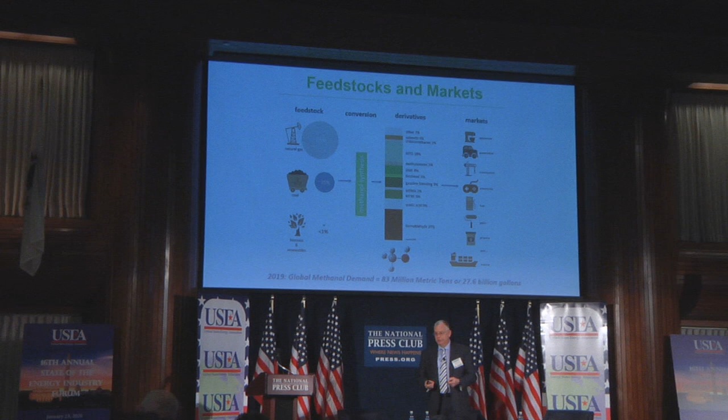Once you take that synthesis gas and turn it into methanol, CH3OH, the simplest alcohol fuel, you open up a wide range of markets. Last year, total global methanol demand was about 83 million metric tons, or 27.6 billion gallons.

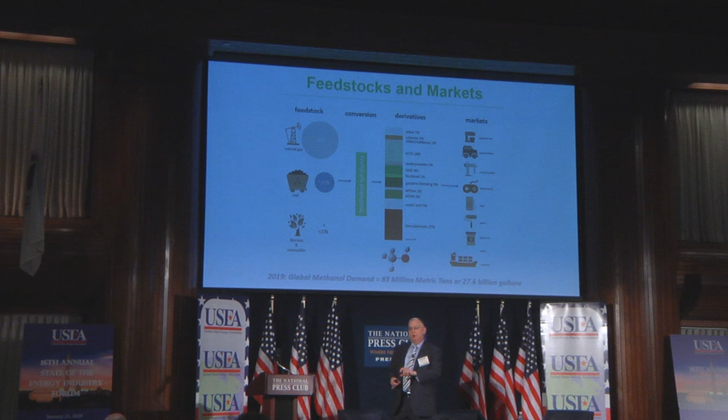We're sort of on the scale of the global ethanol industry. 60% of our market uses methanol as a chemical commodity, a building block for hundreds of products that touch our daily lives—paints, plastics, solvents, resins, car parts. But 40% of our market is the use of methanol as an emerging energy resource, and the fastest growing sectors of methanol demand are in the energy sector.

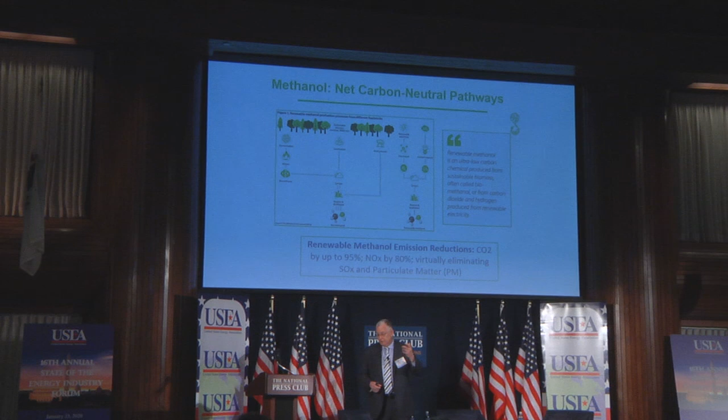Now, we have a number of pathways to produce methanol as a net carbon neutral fuel. You can take any biomass resource—municipal solid waste, forestry residue—and gasify it to produce that synthesis gas used to make methanol. We can also take biogas from anaerobic digesters, landfill gas, wastewater treatment, and dairy farms, and use that biogas to make methanol.

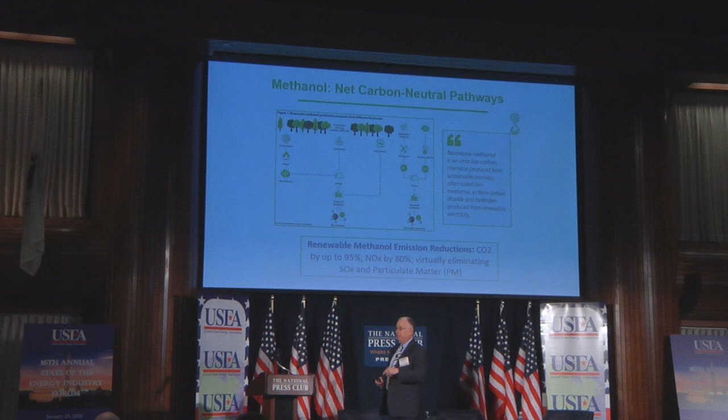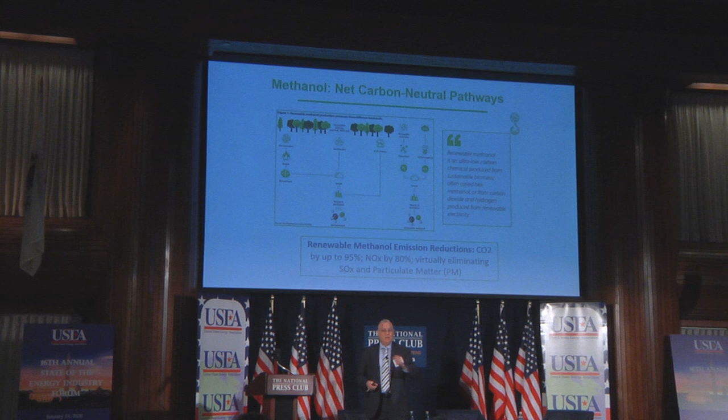One of our member companies is actually the largest purchaser of biogas here in the United States. They produce biomethanol in Texas that's actually sold into the European market, where it's considered a second-generation advanced biofuel and qualifies under the European Union's fuel quality standard. You can blend 3% methanol in gasoline anywhere in the European Union today—it's part of their fuel requirements.

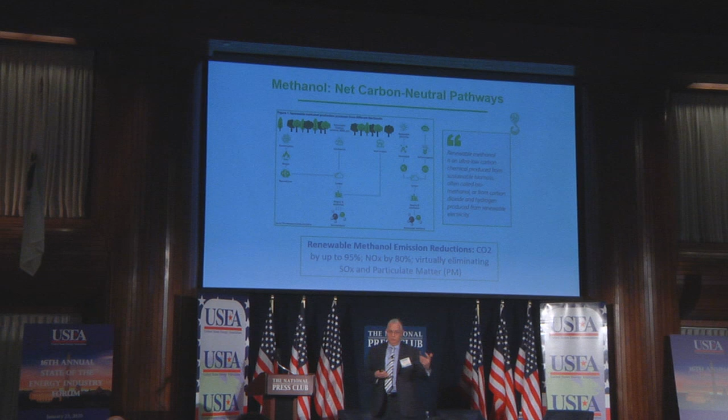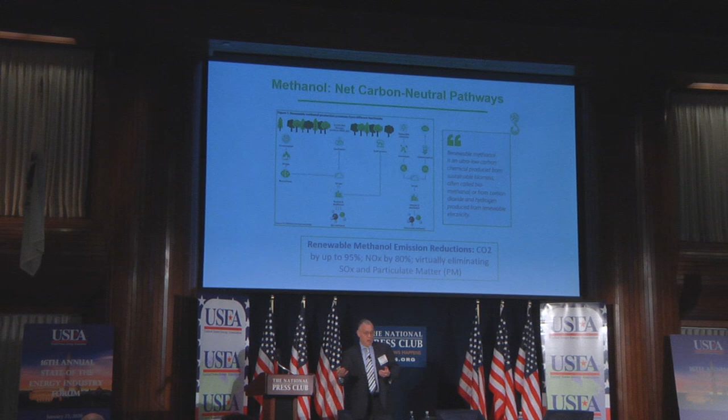You can also take any renewable electricity resource—solar, wind, geothermal, hydropower—and produce hydrogen through electrolysis of water. Now again, to make methanol synthesis gas, hydrogen and CO2, the CO2 can come from a process waste stream, a cement plant, aluminum or steel mill, or in the near future, we'll see direct air capture of CO2—literally stripping CO2 from the atmosphere.

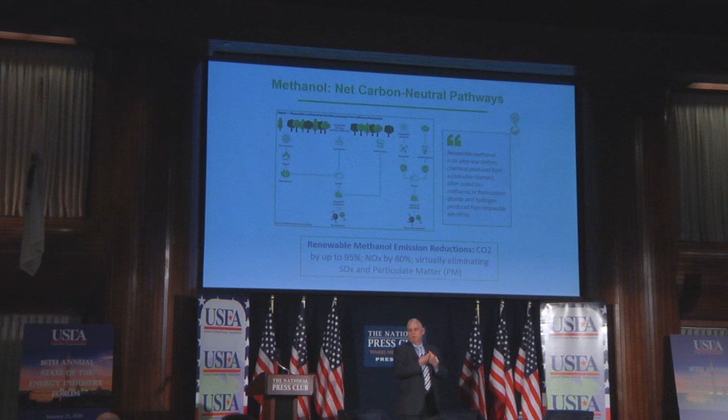Combine renewable electricity and CO2, and you make renewable methanol. That's a carbon neutral fuel, reducing CO2 emissions by up to 95%. And it's being done commercially today.

Here in the United States, we produce our methanol from natural gas. Because of the shale gas revolution, over the last 10 years, in the 2010s, we saw a resurgence of methanol production. We had methanol plants that had been mothballed for a decade brought back to life, and we have new greenfield plants being built in the United States.

We had two plants that were literally cut up in Chile and moved to Louisiana to take advantage of the affordable natural gas here in the States. And more is on the way—we've got a plant being built right now in West Virginia using Marcellus shale gas, and there's another plant coming online later this year in Louisiana that's being built with some investment from China.

And we've got a lot more plants that are on the way. Each one of those methanol plants will cost somewhere between $1.1 to $1.8 billion to build. We'll create thousands of construction jobs, hundreds of permanent jobs, and we'll use a lot of natural gas, about 125 million cubic feet a day, or 45 billion cubic feet a year. So a methanol plant is a huge consumer of natural gas.

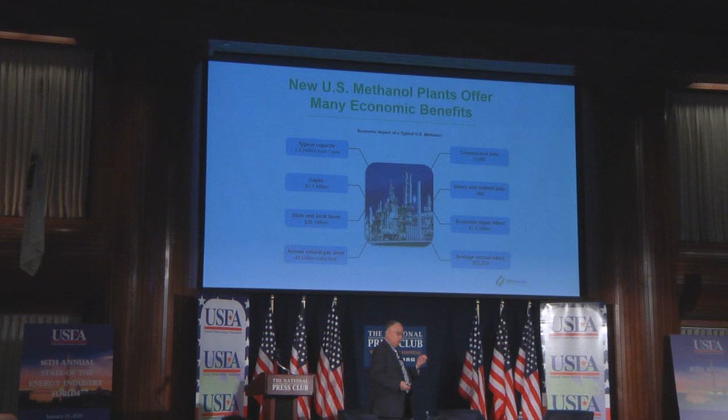As we're building all those methanol plants, we're looking at mostly an export market. China is the world's largest market for methanol. China consumes more than half of all world methanol demand. The fastest growing segments there are the use of methanol as an energy resource, the direct use of methanol as a fuel, and also MTO, methanol to olefins, olefins being the feedstock for plastics.

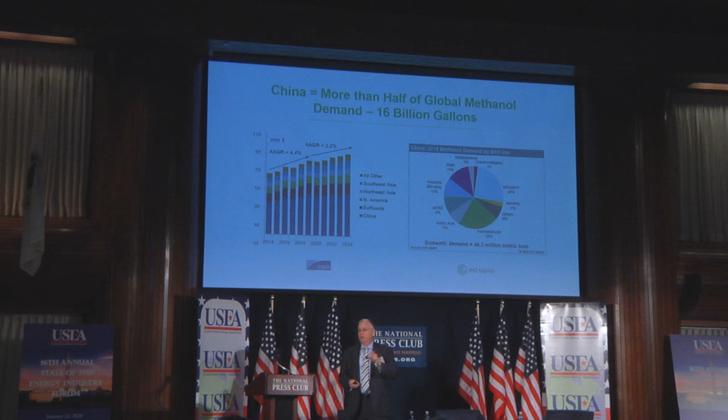Now we also have tariffs. We've talked a bit about tariffs today. Methanol has a 25% tariff on both the US and Chinese side. The US went first, China reciprocated. Now, we don't actually import methanol to the US from China. We're building methanol plants here for an export market. China is the world's largest market for methanol. The Chinese don't want to sell us their methanol, they want to buy our methanol. That would reduce our trade deficit with China. But we have a 25% tariff.

We also talked a little bit today about the phase 1 deal announced last week between China and the US. China has agreed to purchase $52 billion more in energy products from the US in the next 2 years. Methanol is on that list as an energy product from the US, but with a 25% tariff, it's kind of hard to compete on global markets, particularly when the main supplier of methanol to China is Iran. They're not facing a 25% tariff.

Now, speaking of energy markets in China, one of the fastest growing markets there is the use of methanol as a direct transportation fuel. The EIA put out a study 2 years ago now where they were looking at the direct use of methanol as a fuel in China at about 200,000 barrels per day. That use is as M15, 15% methanol blended with gasoline. So 15% methanol, 85% gasoline, used in the existing fleet of passenger cars as a high-octane fuel.

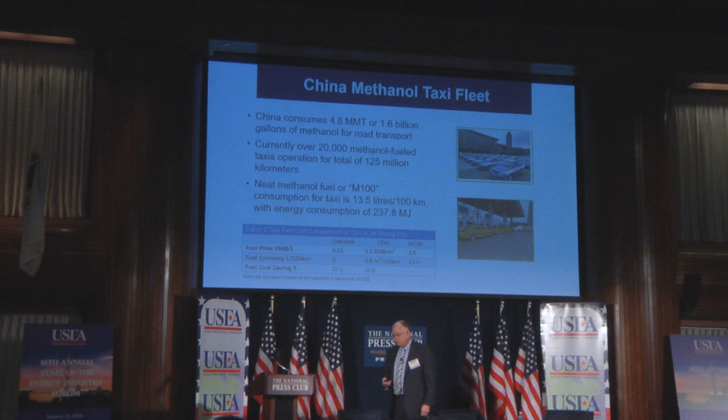The Chinese government last year announced a public policy promotion for the use of M100 in cars, trucks, and buses. It was driven by the Ministry of Industry and Information Technology and 7 other ministries, calling again for the commercial introduction of M100 fuels. They've now approved 32 different vehicles from 9 different manufacturers, heavy duty and light duty, for the sale and use of methanol fuels.

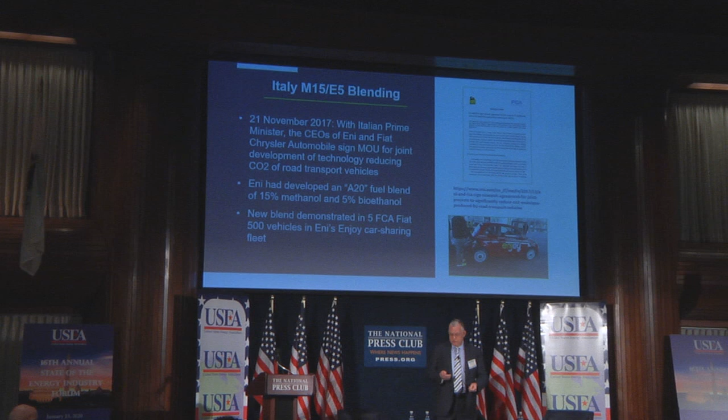In Europe, one of the largest integrated oil and gas majors, Eni in Italy, joined with Fiat Chrysler to look at how to reduce CO2 emissions from today's cars. And they came up with an A20 blend: 20% alcohol, 15% methanol, 5% ethanol. It reduces CO2 emissions. They've demonstrated this in a fleet of Fiat 500 cars. They find that this A20 blend is a 100 RON fuel. That's important because automakers are always targeting 100 RON for more efficient, high-octane fuels. Methanol can do that. They also showed that this fuel is transparent to all E10 cars, which means that while both alcohols, methanol and ethanol, are slightly more corrosive than gasoline, there's no problem using this high-octane, high-alcohol fuel blend in today's cars.

In Germany, there's a program called C3 Mobility, for closed carbon cycle. It's a program of the German government and the auto industry. What they're looking at is, again, how do we reduce the greenhouse gas emissions from the automotive sector? Their focus is on the renewable methanol molecule. So if you look at Germany, they're supposed to be a carbon neutral economy by 2050.

To get there, you've got to use a lot of renewable energy. Now, Germany doesn't have the capacity to produce all the renewable wind or solar power that they need to get to their targets. They will have to import that renewable electricity in some other form.

Now, in Europe, we talk a lot about e-fuels, electrofuels, power to X. It's taking that renewable electricity and turning it into a liquid fuel that you can move around the world. So you can take solar and wind farms in North Africa, turn it into liquid methanol, and ship it into the German market. Germany expects that by 2050, one third of their total energy fuels will come from this power to X, and methanol is one of the fuels they're looking at.

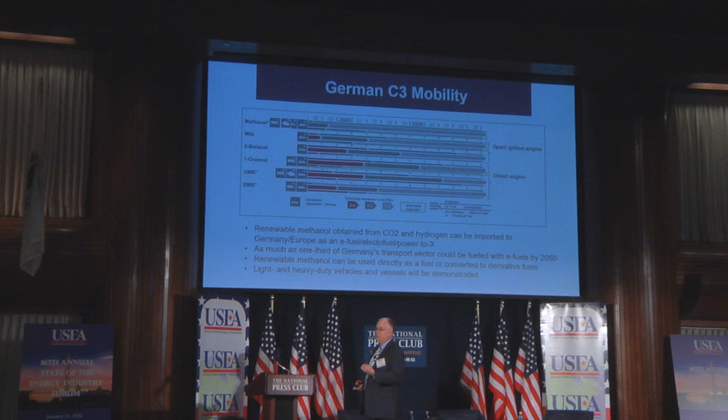So under this program, they'll be demonstrating a wide range of light-duty cars and heavy-duty vehicles running on methanol and also derivative products. They'll take that methanol, turn it into gasoline, or turn it into other fuels like OME and DME that can be used in heavy-duty vehicles.

Now, turning from road transport to shipping, the shipping industry is being driven by emission reduction requirements from the International Maritime Organization. This month, the requirements to reduce sulfur in bunker fuels went into place. By 2050, shipping is supposed to reduce their greenhouse gas emissions by 50%. Now, the ships going on the water today are going to be on the water for 20 to 30 years, so for shipping, they've got to make decisions now about how to meet their obligations for 2050.

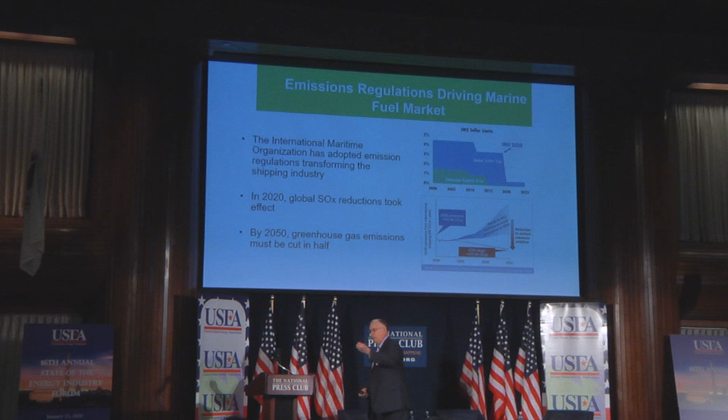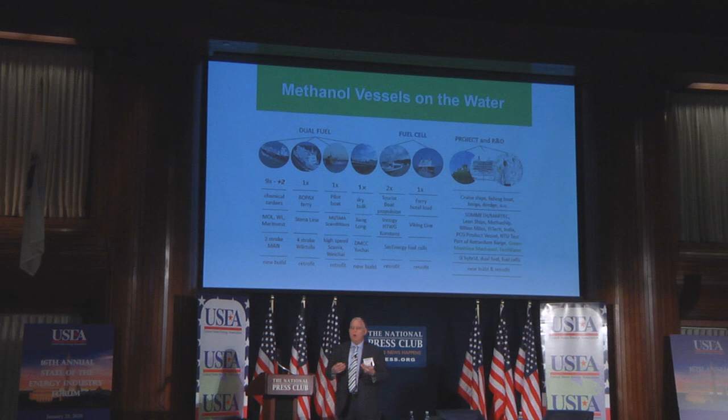Methanol is one of the options for shipping. We've got a number of vessels on the water today. Some of these are ocean-going chemical tankers with dual fuel capability - they can run on any diesel bunker fuel or methanol and switch back and forth with the press of a button. And now we're seeing this use of methanol as a fuel, as a hydrogen carrier, in cruise ships. We're also looking at using methanol in workboats, tugboats, and ferries. All can be used with methanol.

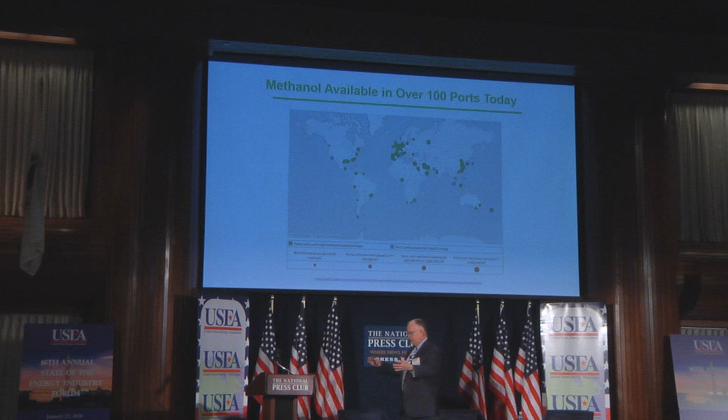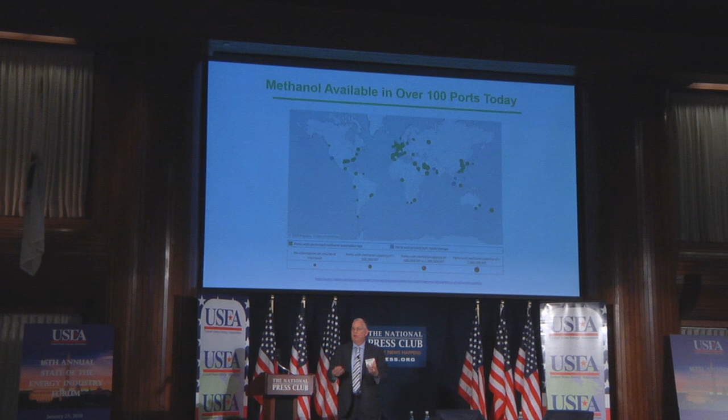Methanol is one of the most widely shipped chemical commodities in the world. Of the 83 million metric tons of methanol consumed last year, 60% moved from one continent to another. Any port where you've got large chemical storage tank farms, you've got methanol storage capacity. So we've already got methanol available at 100 ports today. That methanol is in the port right now - it's one of those widely shipped chemical commodities in the world.

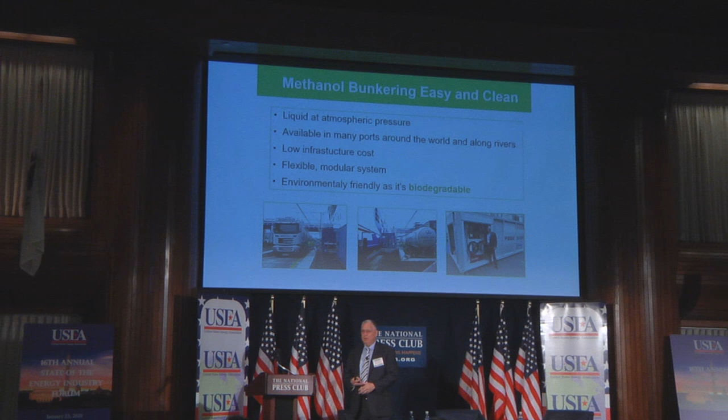In terms of cost, methanol has half the energy content of diesel, so you need twice as much. But even though we need twice as much fuel, we're competitive with today's bunker fuels. Today, methanol is actually selling at a discount to low sulfur marine gas oil, so we can be competitive on fuel cost. In terms of bunkering methanol, it's a liquid at room temperature and ambient pressure - it's easy to store, easy to move from the port, from a bunker vessel, and onto a ship. Methanol is also readily biodegradable, so if you had a spill, it's much safer for the environment than any of the diesel bunker fuels used today.

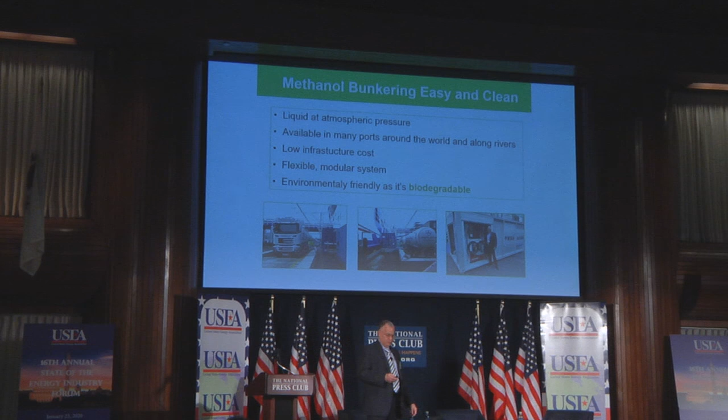Now, to turn again, I want to talk a little bit more about China. I've been to China many times, and every time I go, I hear about some new market for the use of methanol in China.

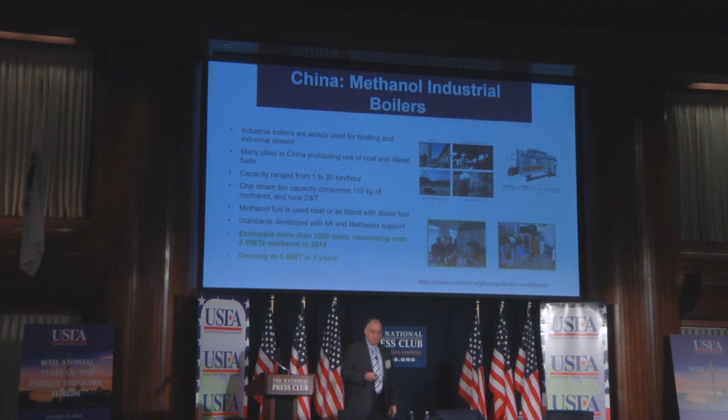China is now banning the use of diesel and coal in industrial boilers used for industry and residential heating. There are more than 1,000 boilers that have now been converted to run on methanol, about 2 million tons of methanol demand. In China, they have less than one tenth of the pipeline infrastructure for natural gas that we have here, so natural gas in many cities is not an option for these industrial boilers. If you take away the diesel and coal, what are you left with? Methanol is an option, and it's actually in most cases cheaper than the use of natural gas, even if it were available. We're also seeing the use of methanol in clean cook stoves in China.

Some of these are one-burner stoves used in residences, but mostly we're talking about large commercial stoves used in restaurants and central kitchens. There it's 5 million tons of methanol demand, that's 1.7 billion gallons, and literally thousands of restaurants are using methanol as a clean cook stove fuel.

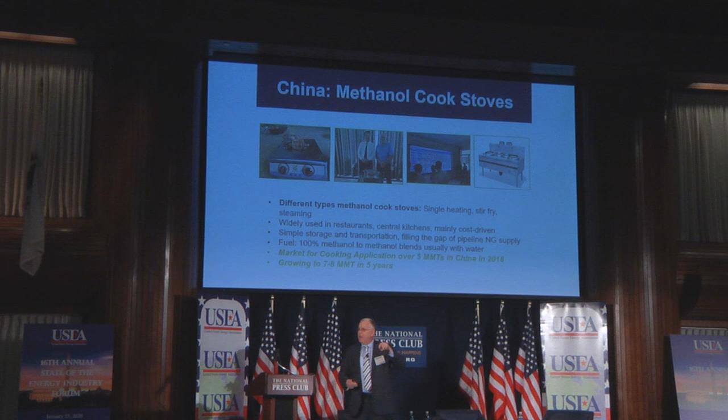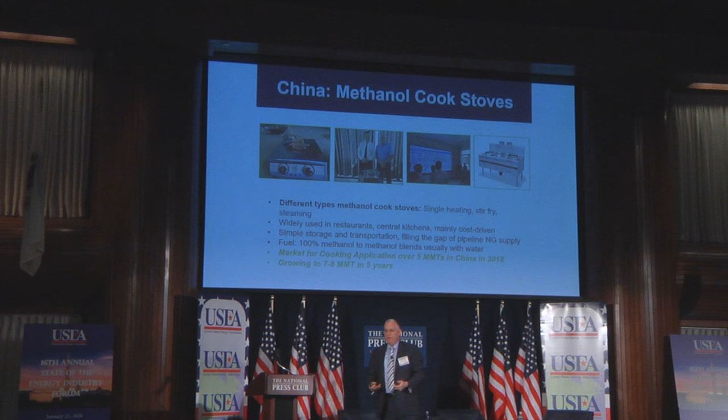This picture shows a cook stove manufacturer in Kunshan, north of Shanghai. They've got a control room with a big screen showing 1,000 points on a map. Each point represents a commercial kitchen using a methanol cook stove. They're so sophisticated they've got cameras in each kitchen, so they can see how it's being used and make sure it's safe. They can control the methanol supply remotely—if a guy doesn't pay his bill, they can turn it down. They can also dispatch methanol through an app; you just go on your phone and say send me this much methanol, and they can ship it immediately.

We're now seeing the use of methanol in kilns for glass and ceramic production. China produces 60% of the world's glass products. When you're using methanol to make ceramics, remember the molecule is CH3OH—there are no carbon-to-carbon bonds, and it's carbon-to-carbon bonds that produce soot or particulate matter. So you actually produce a higher quality ceramic using clean-burning methanol, and it's cheaper than the propane it's largely displacing. So it's cheaper and it's higher quality.

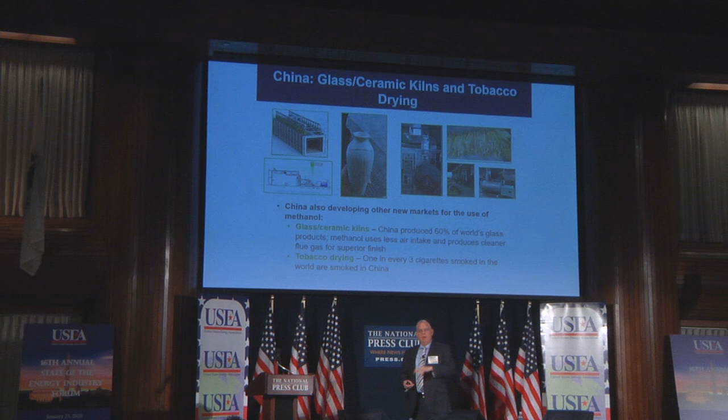They're also using methanol for drying tobacco in China. Every third cigarette smoked in the world is smoked in China, so it's a big market. Also, in India they're now using methanol for drying tea, which is another emerging market. The newest market I heard about is the use of methanol for home heating. In one province, Shanxi, there's now 30,000 homes using methanol for heating, and another 50,000 will be added this year, so we're seeing that market grow in China too.

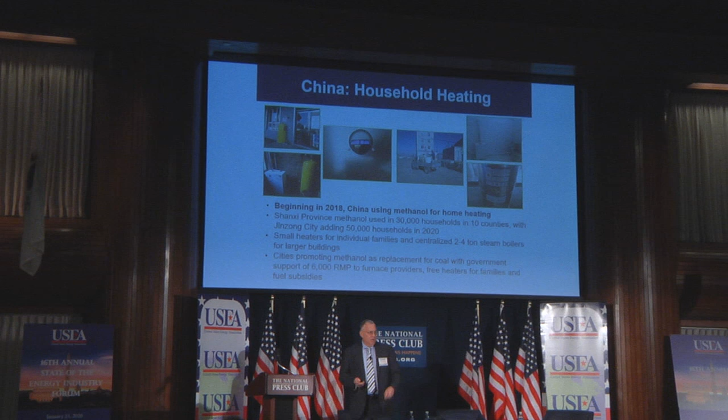Now I want to close by talking about the use of methanol as a hydrogen carrier for fuel cells. As Deepka noted, there's a lot of hydrogen in methanol, CH3OH—it's got the highest hydrogen-to-carbon ratio of any liquid fuel. You can take that liquid methanol, put it on a car, and reform it to hydrogen. So you can take a fuel cell, fill up a car with liquid methanol, and then use the hydrogen from that methanol to fuel the fuel cell.

We're seeing applications in stationary power—typically cell phone towers or remote applications—where they're using methanol instead of diesel generators or battery sets to run cell phone towers. It's also being used in soldier power: there are US troops using methanol fuel cells instead of batteries, reducing the weight soldiers have to carry.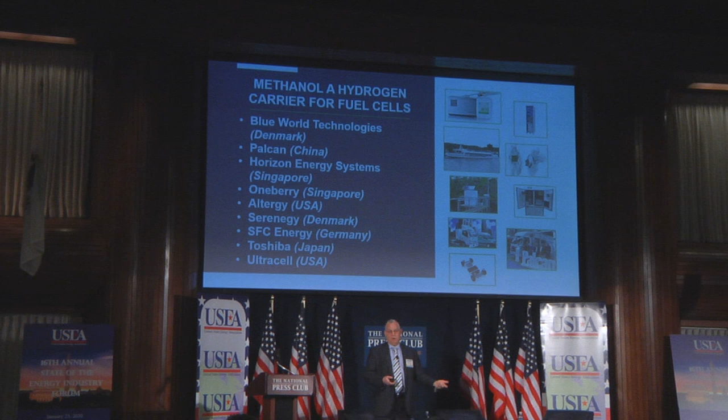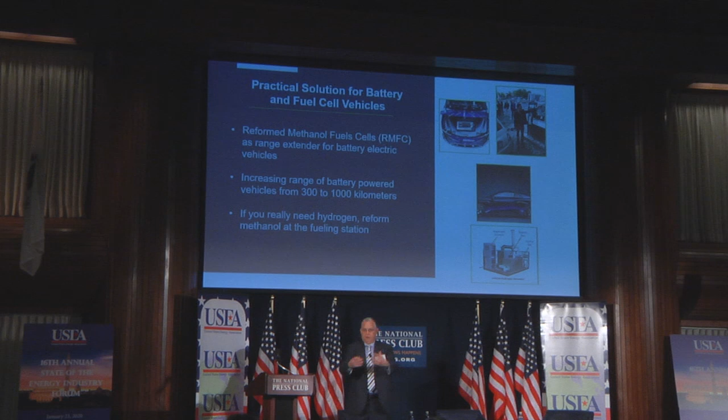We're also seeing methanol as a fuel for fuel cell vehicles, where methanol fuel cells make battery electric vehicle technology practical. You take a methanol fuel cell, fill up the car with liquid methanol in 3 minutes just like gasoline today—no infrastructure concern, no charging concern, no time lost to charging. That fuel cell then charges a battery, and the battery is what actually drives the car, reducing the weight of the batteries by two-thirds using that methanol fuel cell.

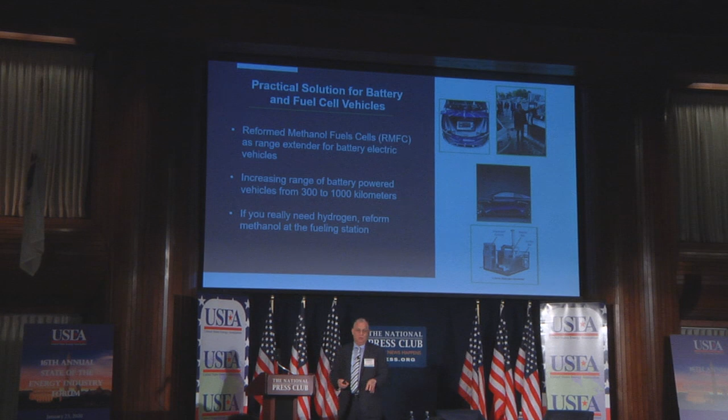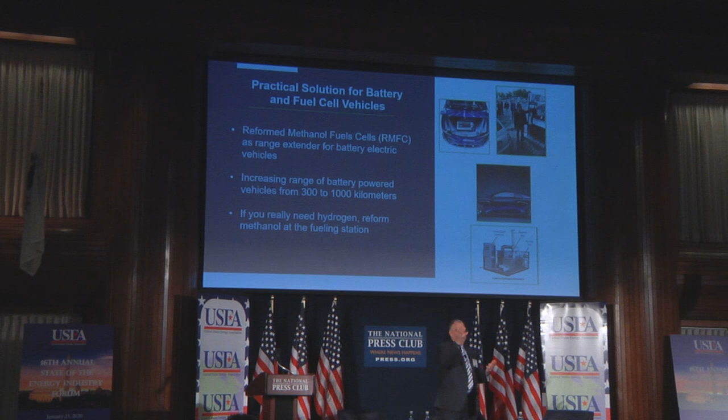So you've got a cheap fuel, a liquid fuel, a fuel that can be produced renewably. You can take a battery EV that might have a range of 300 kilometers, and now you've got a car that'll run 1,000 kilometers—it's a range-extended battery electric vehicle.

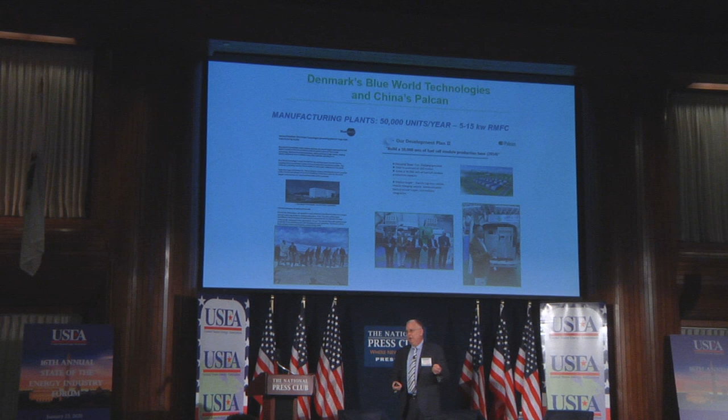And some of this is actually taking place. One of our member companies in Denmark is now building a manufacturing plant that will produce 50,000 15-kilowatt methanol fuel cells a year for mobility applications, range-extended EVs. Another of our members, Palcan, is doing the same thing in China, just north of Shanghai—a new manufacturing plant will produce 50,000 methanol fuel cell units a year. So this is real commercial technology.